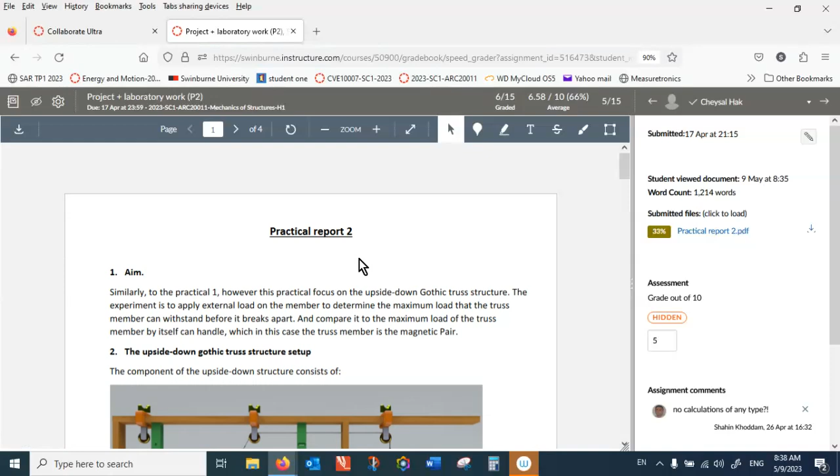You did submit them, but let's see if you have done the snapshot for the E-calculator, when it shows the deformed structure. Oh, you want me to include that? Yes, these are, I thought just go on the results. Can you scroll up a bit? I just wanted... I thought you just want this one. No, this is nothing, it doesn't show the deformation.

For every case you solve, you get a distribution of the internal forces. So you want to show, look, this is the maximum tensile load. How can I check this from this image? It doesn't have anything, this is just geometry, no load, no deformation, no forces, right?

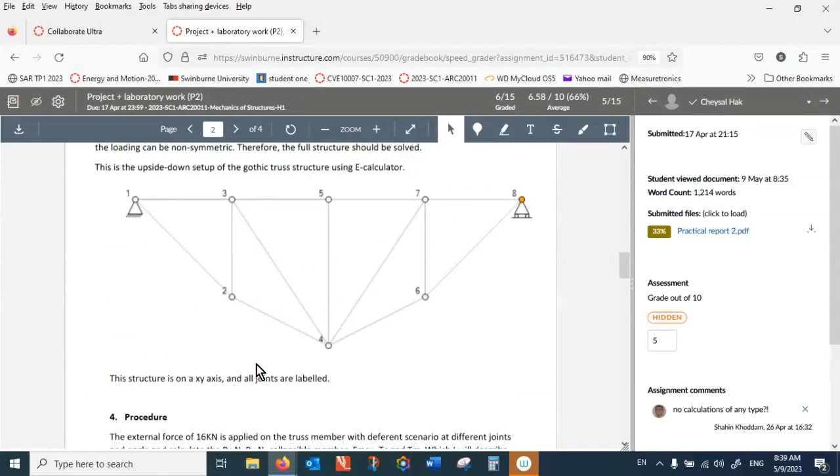My bad. All right, I should have, I did it but... yeah, yeah, that's okay.

That's okay, but I see that many people haven't done their submission, and that makes me worried. So if I go to the grades...

This is Prak. So Daniel, Abdullah, Ahmad, Nijil, Barnaby, Shah, yeah, they haven't done these reports, not to mention Serish. All right, let's wait for everyone to come. Thank you, all right.

All right, today we will be running a demonstration, and tomorrow is for the third lab.

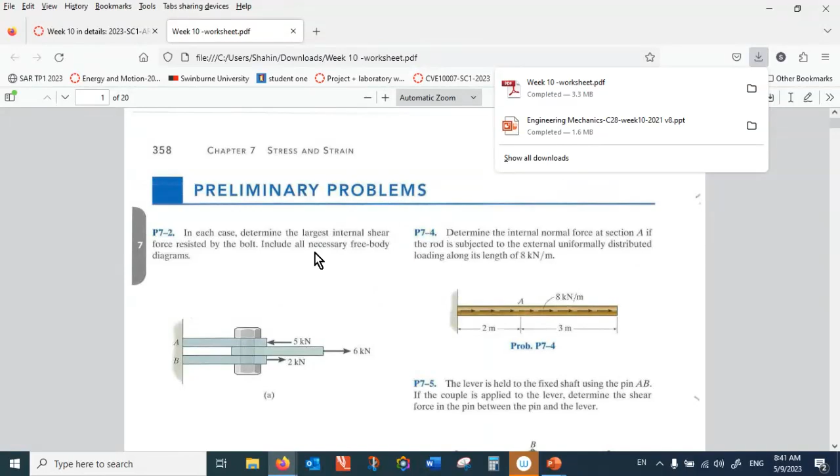Let's go to page 358. Okay, 358, and here we have some problems regarding average stresses, whether they are shear or normal. Let's take the...

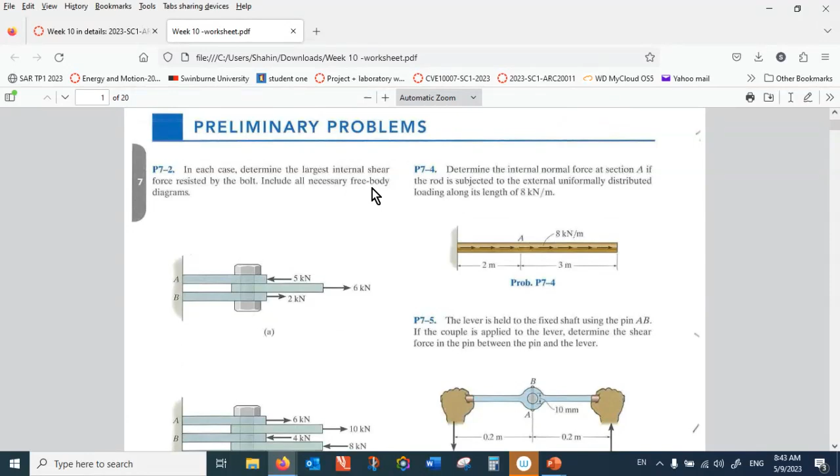Okay, we'll start with problem 7-3, that is on page 358. Can you see it from there? Is it visible?

Okay, so here you've got a bar, and in this bar there are a number of point loads, and as a result the normal stress is not constant through the bar. So if I choose to make my section between B and A, or between B and C, C and D, or D and F, for each the internal force would be different.

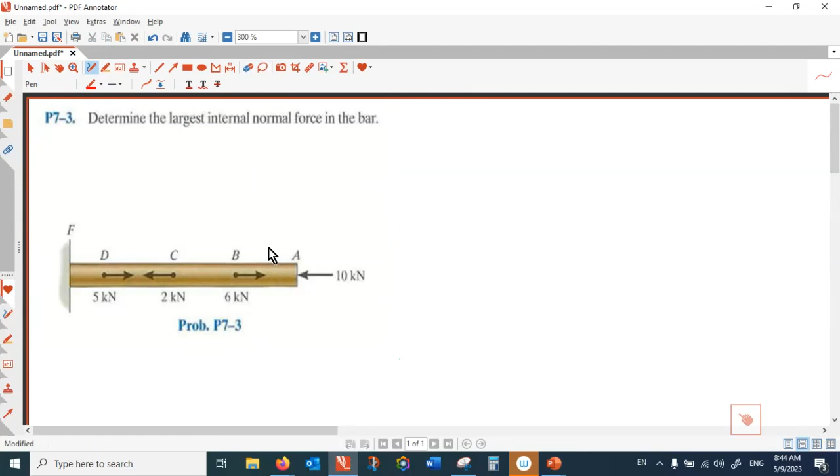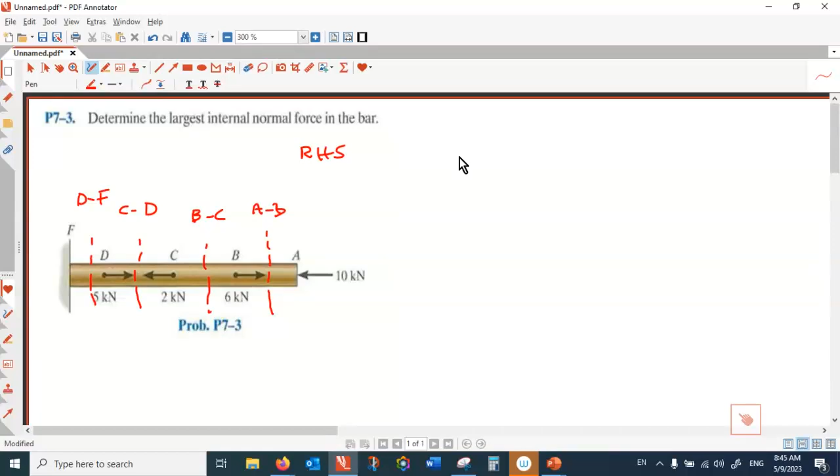All right, so let's find out. If I make that section AB, that is the free body diagram, and I'm looking into the right-hand side free body diagram. This is for BC, and that is for CD, and that is for DF. So when I make the section at AB, the free body diagram looks like this: this is A, and that is 10. So the right-hand side is going to be equal to that one, 10.

And so here, F-AB is equal to minus 10. That means the member is under compression.

So when we make the free body diagram for BC, then you will have a free body diagram with 10 here and 6 here, and then I need another 4 to make this at equilibrium, right? 4, 6, 10 cancels 10 from right to left. So here I get the internal force of BC is equal to minus 4. That is also in compression.

And if we make the free body diagram between C and D, so that is 10, 6, and then you have a 2 here. So I need another 6 here to make this balanced, right? So here, 2 and 10 is 12, so 6, another 6 makes this 12, 12. So this is F-CD.

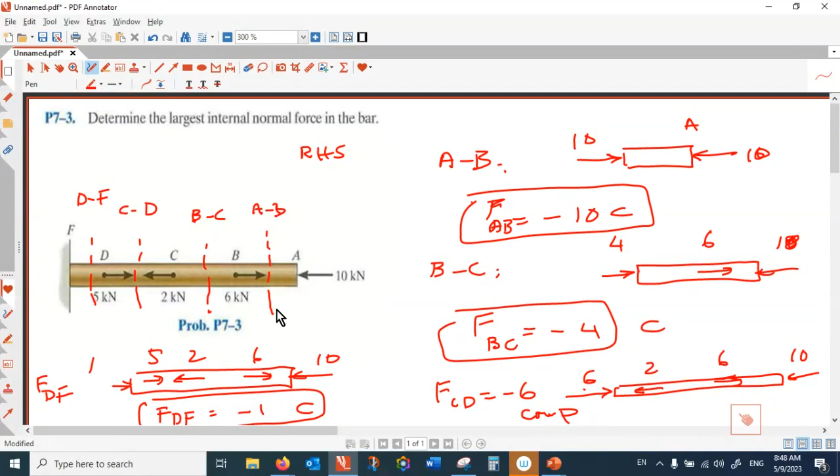All right, so the largest internal stress would happen where? The largest internal stress develops between A and B. So here we got the largest internal force, largest internal stress, because the cross section doesn't change -- the cross section is the same.

Question. You want this, or can I go to the next question? Clear? All clear?

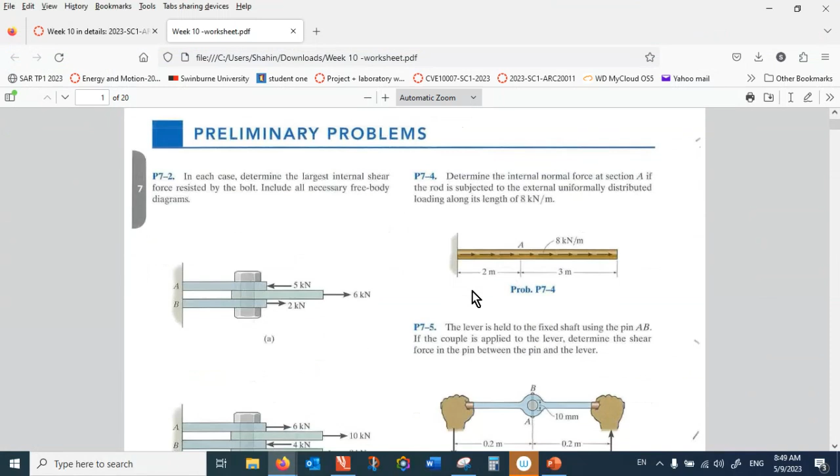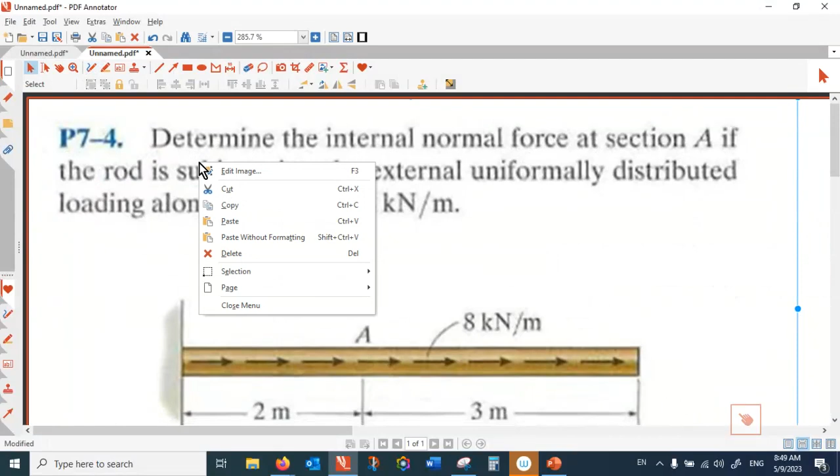Do you want to try this one yourself, or should I start discussing the problem? So here the axial force is distributed, that's a load intensity, but that is in the x direction. The unit is kilonewton per meter.

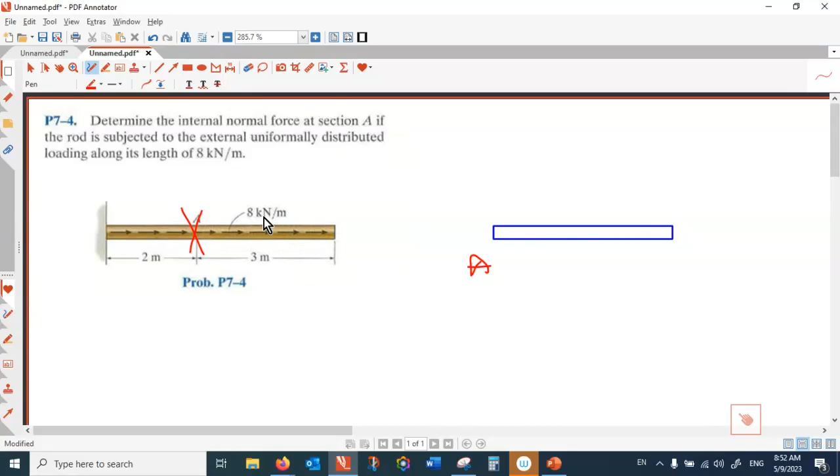I have only a portion of the distributed load for the length of 3 meters. So for that 3 meters, 8 kilonewton multiplied by 3 meters, that is 24 kilonewton. So where should I place that force? It doesn't matter, but basically if I want to concentrate that force, should I put it at the beginning, at the end, in the middle? Where? In the middle, right? We know that the resultant force can be lumped in the center of the shape.

So this 24 comes here, and then I have to add a reaction force at A. Generally speaking, we assume that it's in a positive direction, but because there's only one force, I know that the force has to be in this direction to cancel that one, right? So here Fa becomes 24 kilonewton.

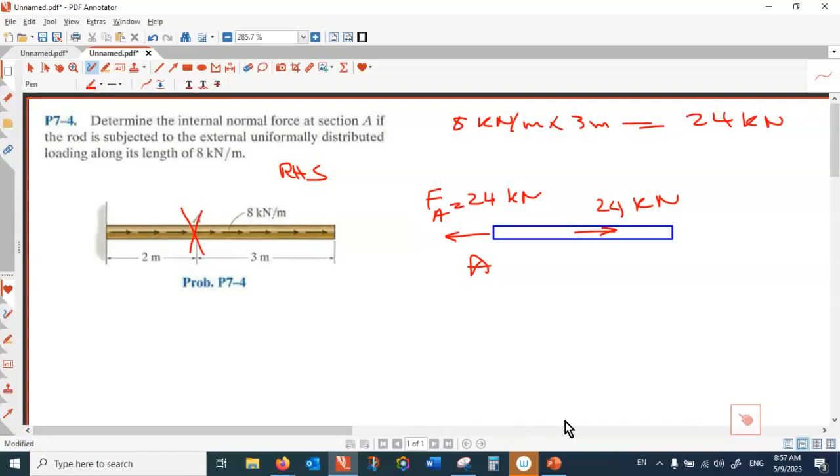All right, 359. I've got 7-7. So that's interesting. Maybe you could give this a go before we try that together.

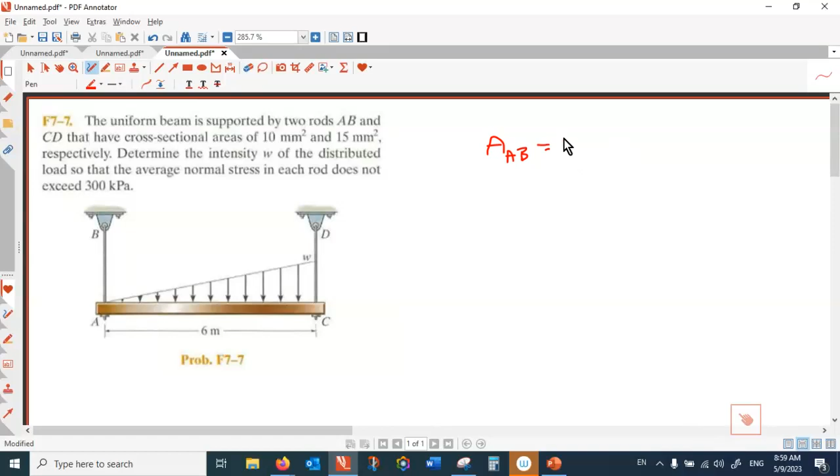Let me summarize the input for you. AB and CD have a cross-sectional area: the area of AB is 10 square millimeters, and the area of CD is 15 square millimeters.

We want to find the intensity such that the normal stress in AB equals the normal stress in CD. Having the normal stress equal doesn't mean the internal forces are equal, because they have different cross sections—one is thinner, one is thicker. So to make the normal stress equal, the internal forces should be unequal to compensate for the cross-section difference.

I would be happy if someone can tell me what steps should be taken. Nguyen, what should we proceed with? What is the first step? Shah, what is the first step? Speak up. You mean distributing the load to find... changing the distributed load to a point load, and then what? Chase, what is the first step?

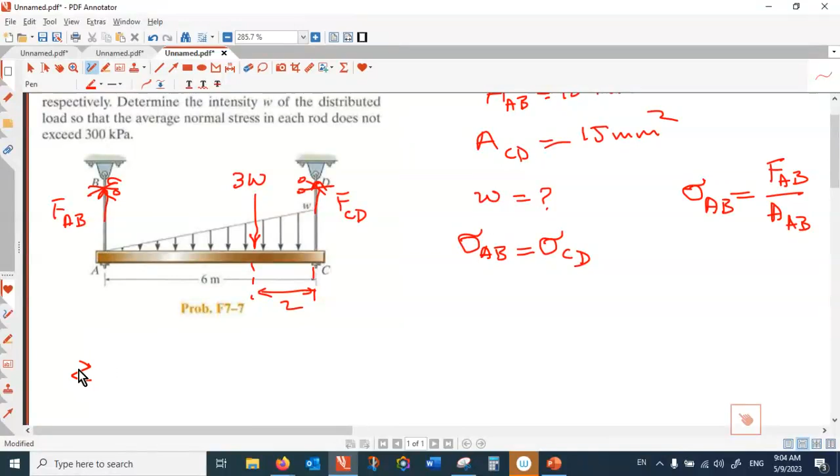What happens if I take rotation with respect to A? Net rotation with respect to A equal to 0, in the positive direction. That would vanish FAB, and then you have 3W times 4 in the negative direction, minus 3W multiplied by 4. This one, if tensile, would be positive, plus 6 FCD equal to 0. So therefore, FCD is equal to 2W.

Now that I have FCD, it's easy to find FAB because the net vertical forces are 0: 3 down, 2 up, so AB would be 1W—1W plus 2W is 3W, which cancels with the 3W here. That's one way of doing it. Or you could write net rotation with respect to point C equal to 0, which also gives the same answer. Either way, FAB is equal to W.

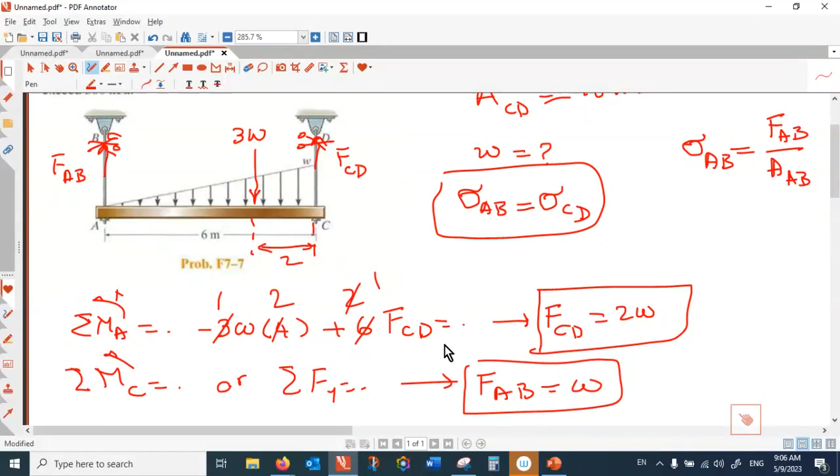What should I do next? Now that I have forces in terms of W, we want to make the stresses equal, so let me construct that equation: Sigma AB is FAB divided by area of AB, which should equal FCD divided by area of CD. That's the condition we were looking for—we wanted the stresses equal in both members. Plugging in the numbers: FAB is W divided by 10, that should equal FCD which is 2W, divided by the area for CD which is 15.

Is that what the question is asking? Because I read it as: they want you to find... they both just have to be less than 300, not necessarily equal. That's the way I read it, but I might have read it wrong. All right, let's see.

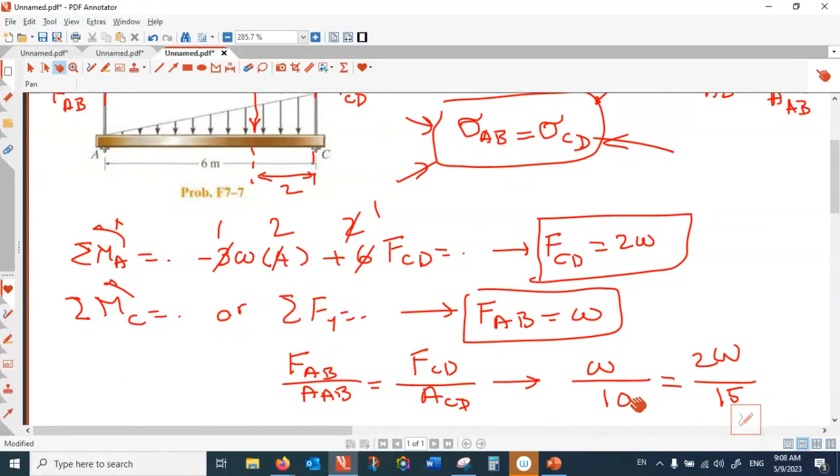You don't want that to exceed 300. I didn't read the last part. You're right, but they don't actually have to be equal, so they should not exceed 300. Because this equation, I don't think you can solve it - if you cancel W, then 1 over 10 is 2 over 15, that's nonsense. So thank you, Aiden, you're right, that condition is not right.

The condition is: the largest value of the stress should still be smaller than 300. So in other words, you want both sigma AB less than or equal to 300 kilopascal, and sigma CD also smaller than 300 kilopascal.

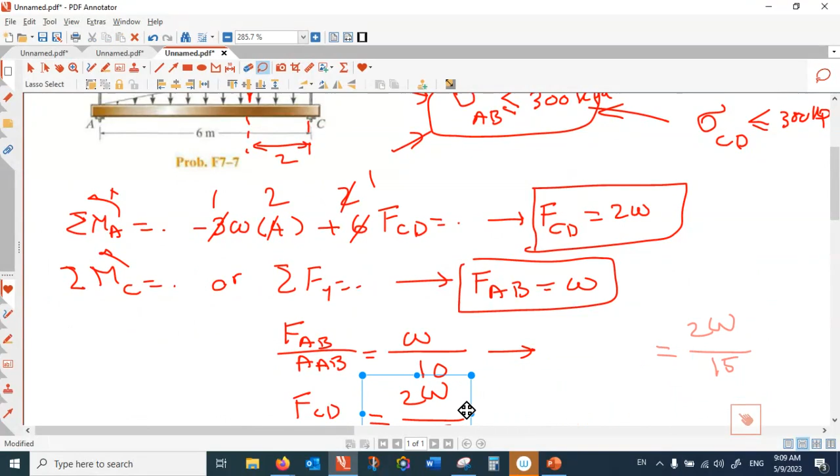So here, okay, now I'm applying the conditions. The first one is normal stress in AB, and this is normal stress in CD. For that to be smaller or equal to 300, when this is kilopascal, you have to choose the units carefully, because this is meters, so your force will be calculated in kilonewtons. So kilonewton divided by square meter, that's kilopascal, right?

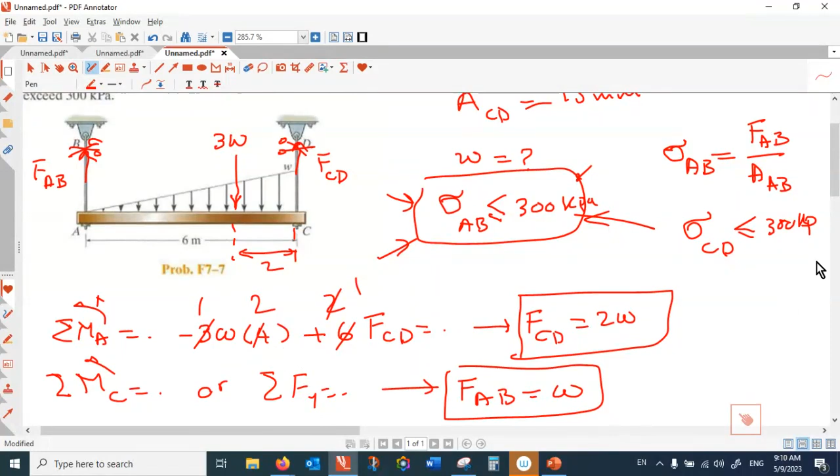So let's try this condition and see which one is more conservative. This is 300. If I solve the first one, W should be smaller or equal to 3000 kilonewton per meter. If I solve this one... 150 times 15, that is 2250.

So which one of these conditions is more conservative? The bottom one, yes. So if you go with the bottom one, both members remain under that stress. But if you go with the first one, AB would be okay, but CD would exceed that stress. So this is the right answer.

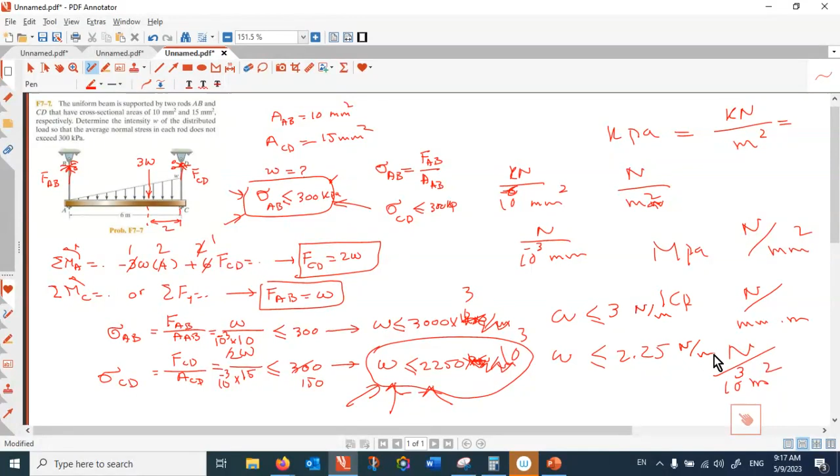All right, the next question we have is 7-8.

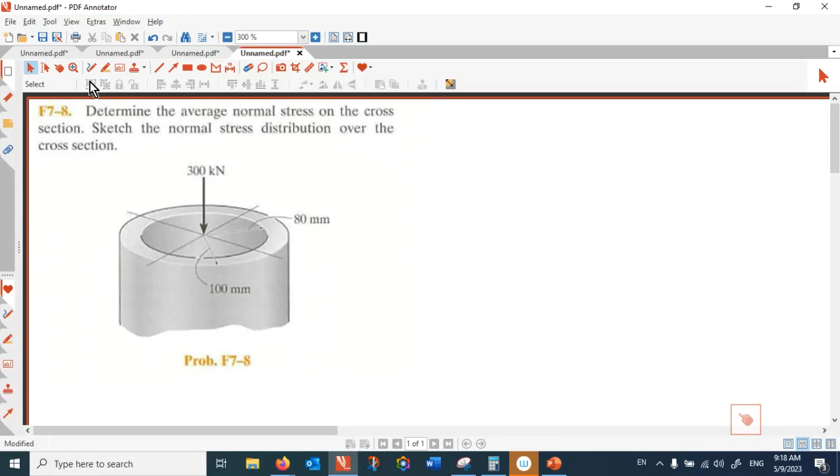So here the force is 300 kilonewton. And what about the area? The area is pi by 4, and I'm calculating this in square millimeters.

So these are the radius, not the diameter. That's pi times, that's 100 squared minus 80 squared. That's the area.

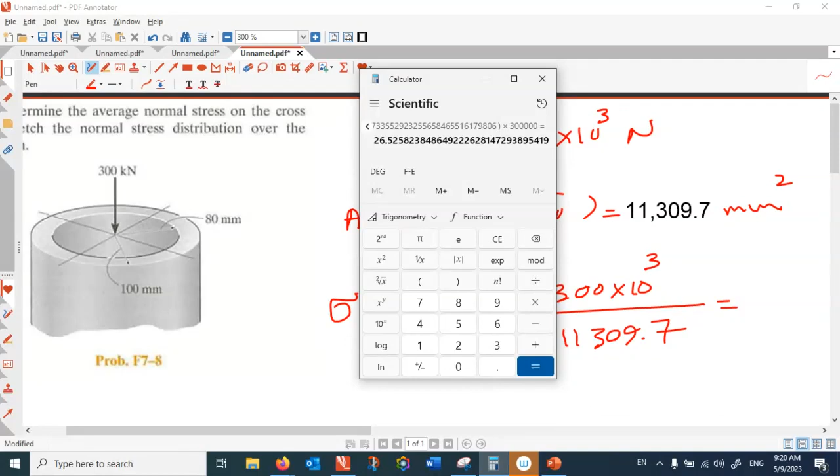Now the stress in megapascal, that is F in Newton divided by area in square millimeter. That is 26.53, and the unit is megapascal. When you keep the force in Newton and the area in square millimeter, the outcome is megapascal.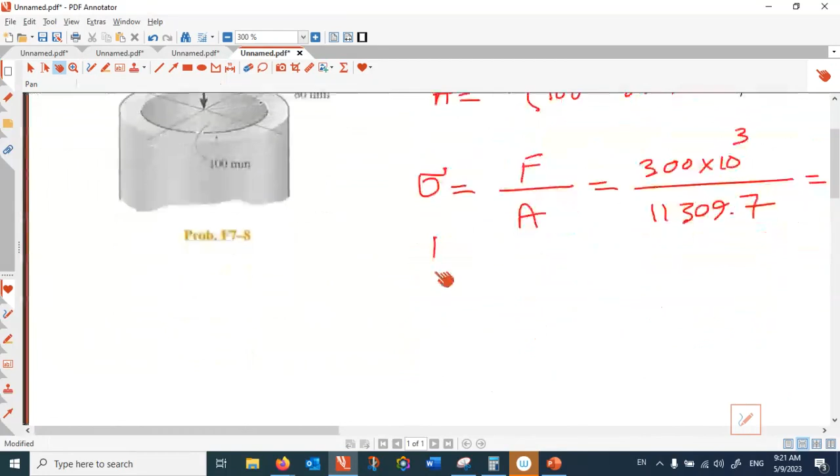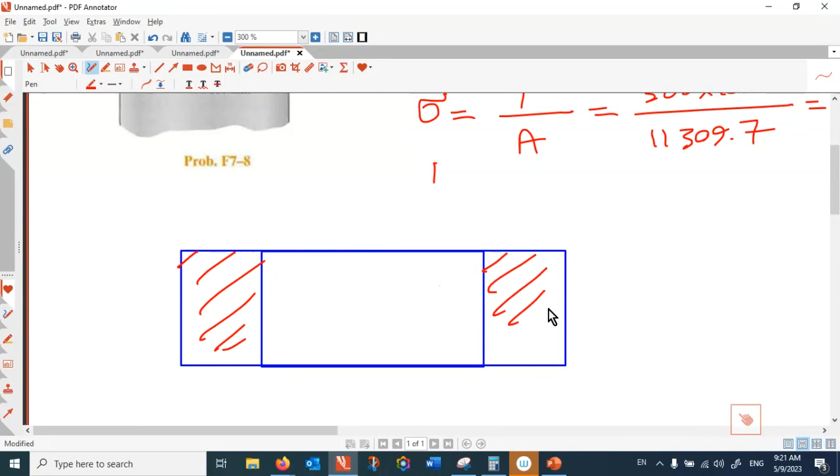Agree? The next thing is you want to show the distribution of the stress over the cross section. Let me show this as a cross section. So this is my pipe. If I make a section, then the stress distribution, I mean the average stress distribution, is like so.

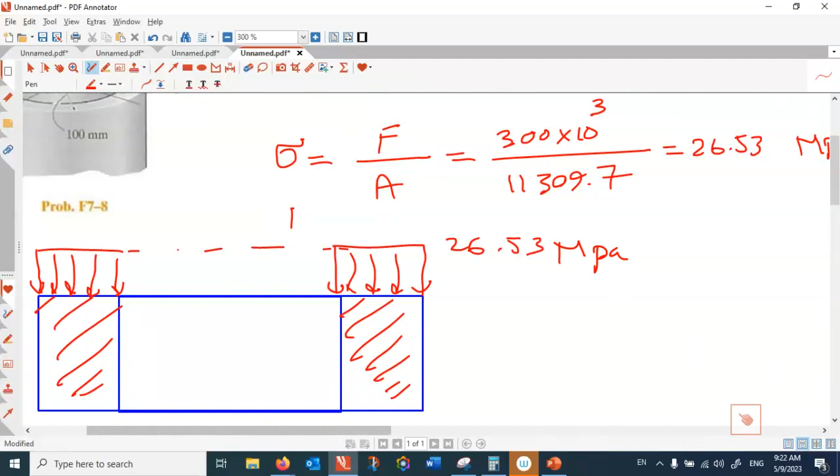26. Anyone needs clarification, or is that clear? You're not sure? Does it just say it's 26.5 for the whole? That is the distribution, that's a load intensity. And then these kinds of calculations are for the average stress. In practice, you might have a stress concentration at the sharp edges, but here we are taking an average one.

So the next one is 7-11. Let me know when you finish with this. Number 11.

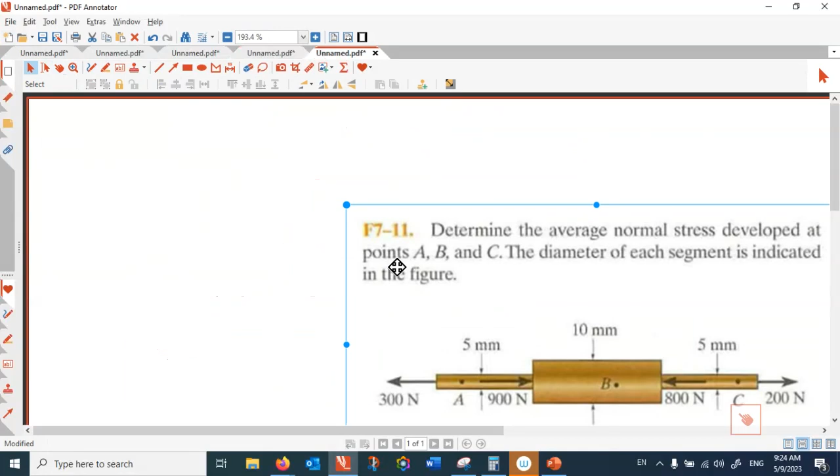Can you see it from the back, or do you want it larger? Here you want to find the average normal stress at points A, B, C. And the diameter is not uniform. So the first step is you have to make a number of free body diagrams to find the internal forces. Once you have the internal force, depending on what the cross-sectional area is at that point, you calculate the average normal stress.

First thing first, I mean that is not needed, but if I ask you to check whether this member is at equilibrium, how would you check? The sum of the forces horizontally should be 0, and that is true.

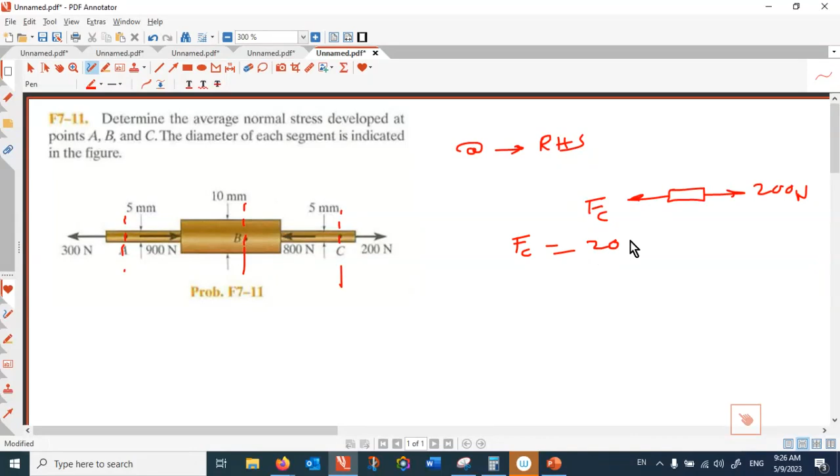Now, it doesn't matter which side, I need one free body diagram at point C, one at B, and one at A. If you are smart, for point C I take the right-hand side free body diagram. That's the easiest free body diagram, and it has 200 Newton, and here I have FC. So FC is equal to 200 Newton.

For B, it doesn't matter which free body diagram I take, right-hand side or left-hand side. So at B, I go with the right-hand side free body diagram again. So the free body diagram would look like this: 200 Newton and 800 here. FB, so FB is 600 Newton in compression.

And 200, is this compression or tension? That is tension, right? And what about the last point, point A? At point A it would be smart if you take the left-hand side free body diagram. I mean both of them give you the same answer, but left-hand side is easier to solve. So that free body diagram would be 300 here and FA over here. Therefore, FA is 300 Newton, and that is under tension.

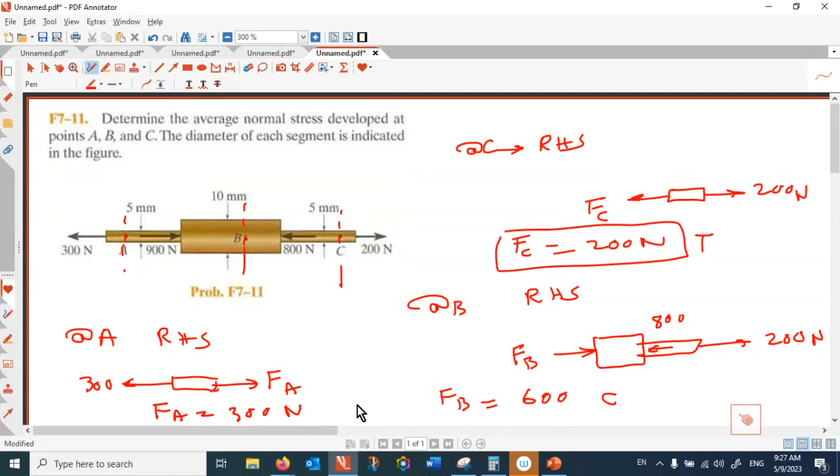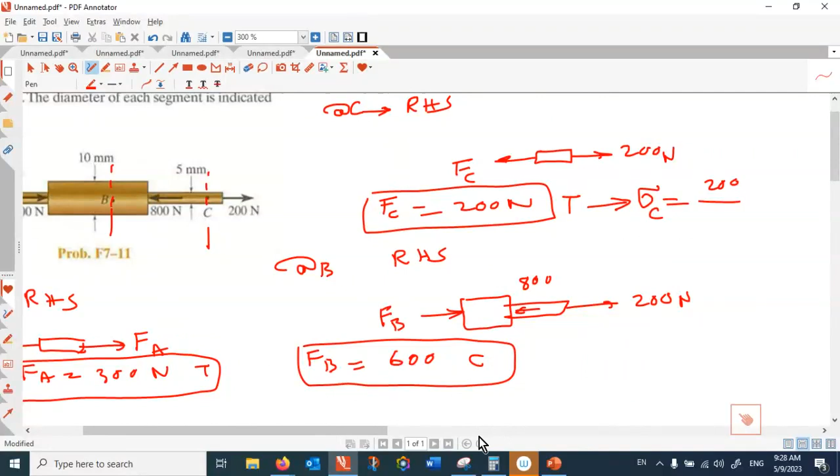And then how do I find the area? The area, when the diameter is provided in millimeters, that is pi by 4 and diameter squared, which is 25. And then what you get here, that is in megapascal, right? How do I know that's megapascal? Because the force is in Newton and the area is in square millimeters. That would be megapascal. And then the outcome, that is in tensile stress. Tensile stress.

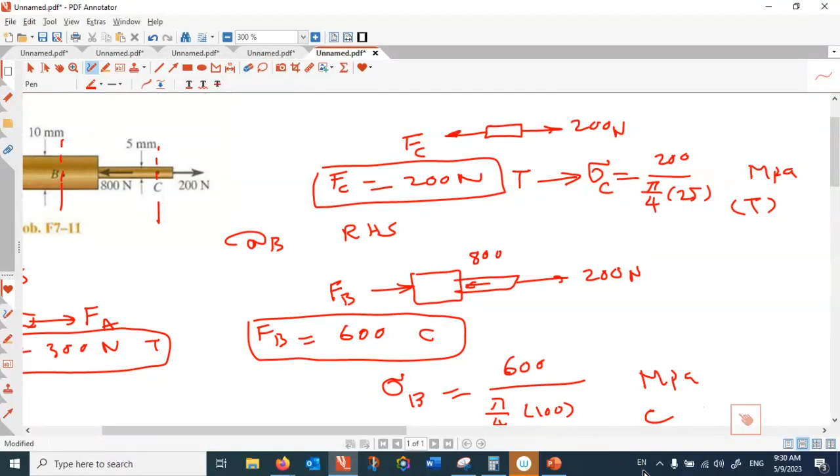So how should I go with B? The average sigma at B, that is 600 over pi by 4 times 10 squared, which is 100. And that is also in megapascal, but this one is compressive. And finally at A, my normal stress is 300 divided by the cross section over there, which is 5 again, pi by 4, 25, and here you get megapascal, and that is tensile.

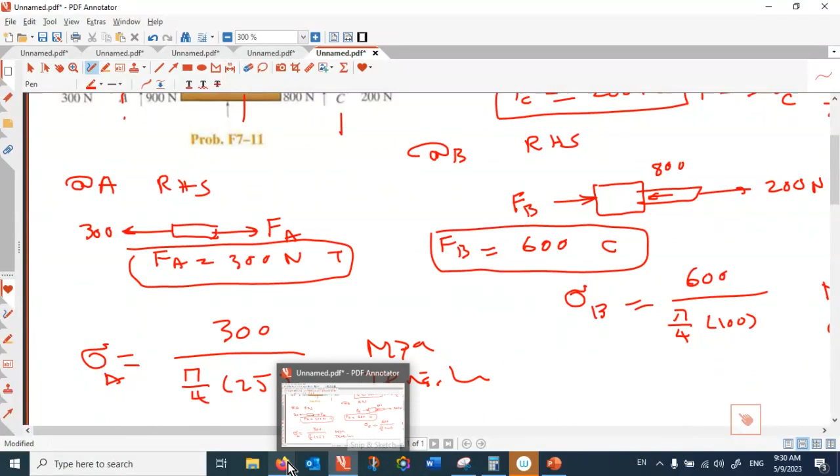So that was the point. This was question 11. Next one is 12.

People ask me whether they need to know material from before the midterm for the final exam. Well, I wish I could eliminate that, but free body diagrams are something you need to know. Without a free body diagram, we cannot find the forces and stresses. You still need to know this is a pin joint structure, and which parts are two-force members. If I want to solve that problem, what is the first step?

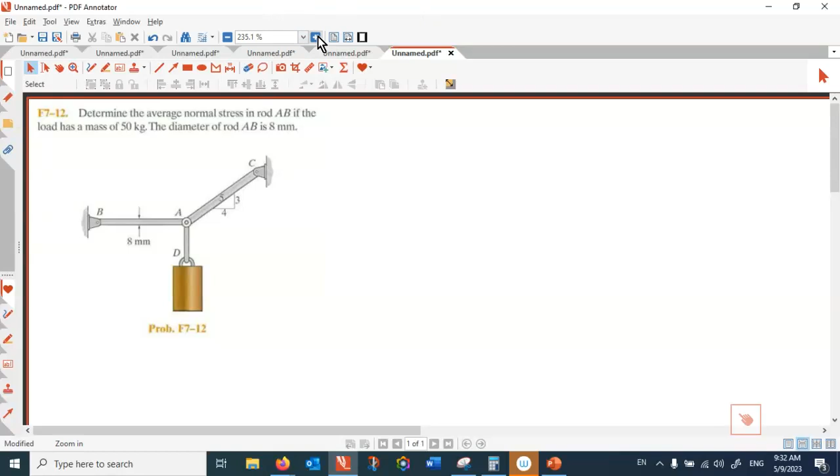Just give us a hint, how should we start with this one? Figure out the stresses. Before stresses, what do we need? Draw a free body diagram. Free body diagram to get what? Internal forces, yes.

The best approach would be to take a free body diagram around A. So I'm going to have one force at that angle, another force like that, and the only known force is 50 kilograms, which is almost 500 Newtons. How do I solve this free body diagram? That is FAB, and this is FAC. One way of solving that is I can simply resolve the force into two components.

That's the easiest way to do it. I could construct a triangle, but then you'd have to use the sine law or cosine law to solve it. This is easier, because if I resolve FAC into the y component, that is FAC times sine theta. Sine theta is 3 over 5, which is 0.6. And if I resolve it horizontally, that is FAC times cosine theta. Cosine theta is 4 over 5, which is 0.8.

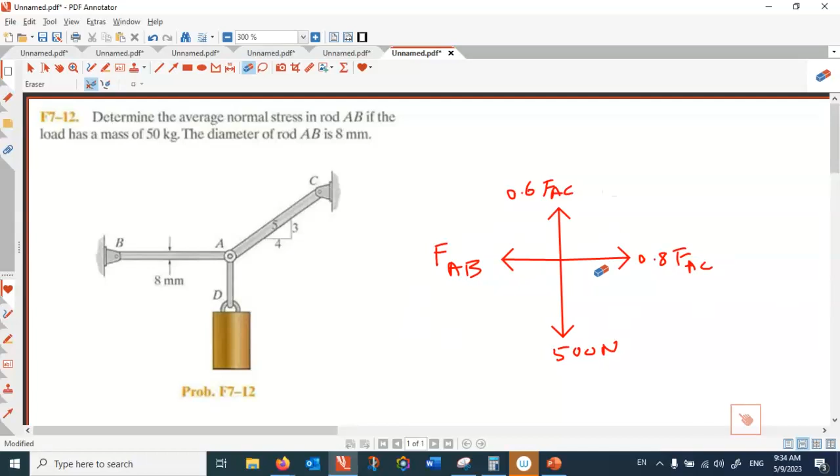Now that I've resolved it, I don't need that force anymore, I can get rid of it. Is that clear? From here, the steps are straightforward because 0.6 FAC is equal to 500. So net forces vertically equal zero, that is 6 over 10 FAC equals 500, and FAC is 5000 divided by 6.

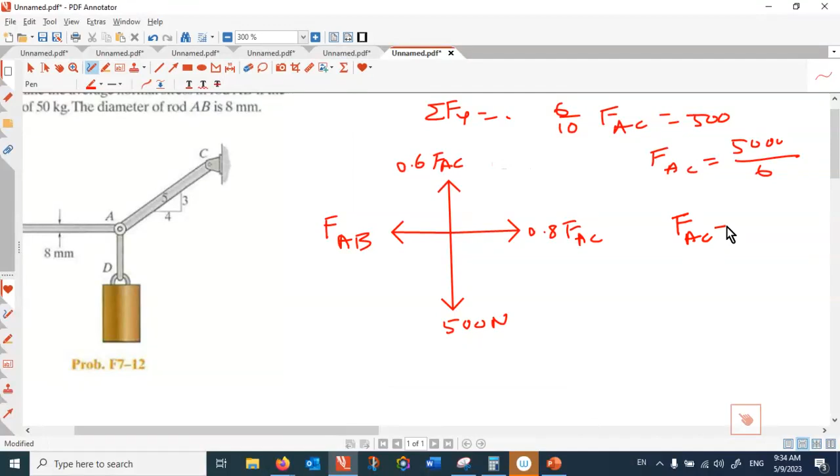That gives 833 Newtons. So now FAB is equal to 0.8 FAC, which is 666.7 Newton.

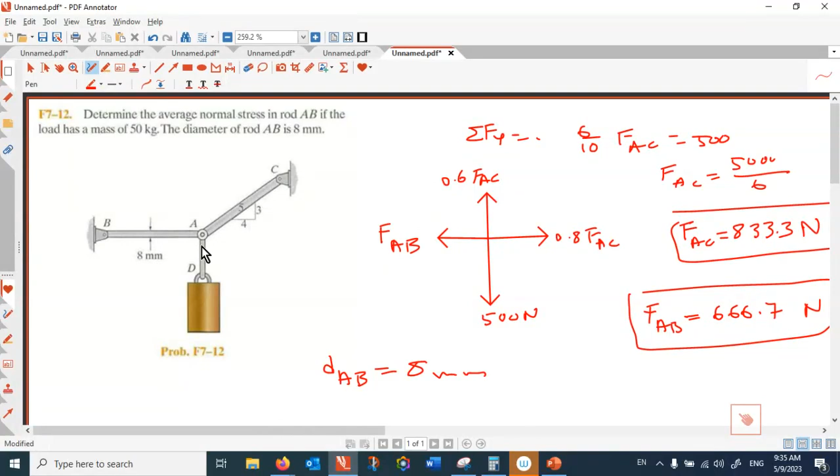Now we've managed to find the internal forces. What should I do next? The diameter of AB is equal to 8 millimeters. We are not concerned about the stress in AC, we only want the stress in AB, so that's all I need.

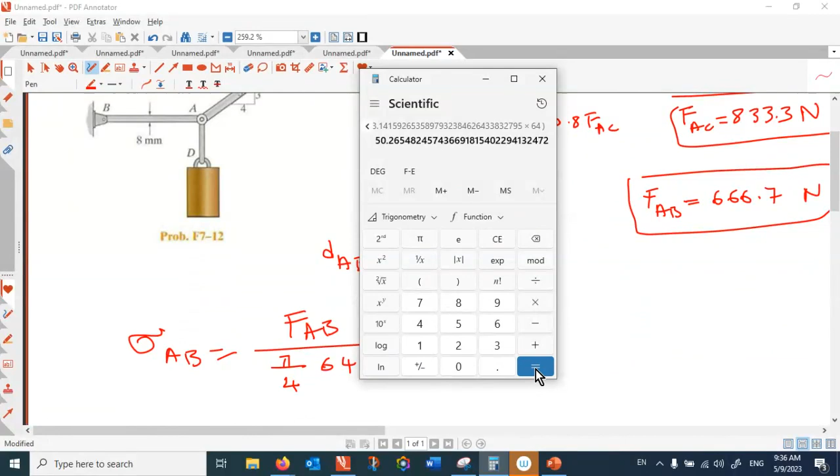So let's find the stress in AB. That is FAB divided by pi over 4 times 8 squared, which is 64. That gives 13.26, and the unit is megapascal.

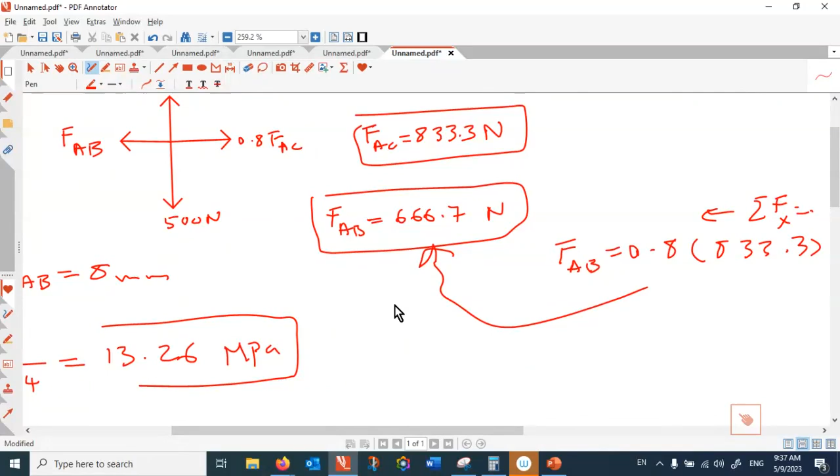Yep, that is net forces horizontally equal to zero, that is FAB is equal to 0.8 FAC, which is 833.3. If you multiply that, it gives you this number.

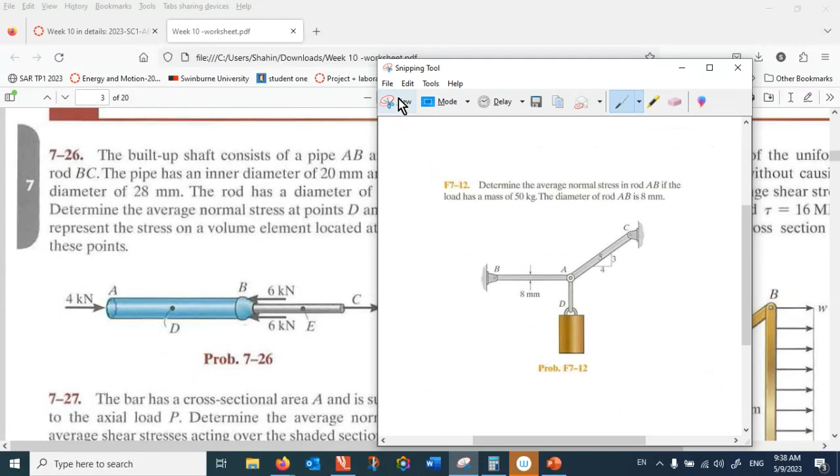By volume element, when it says volume element, it's located... let me see. You are ahead of me, I'm still not there. Okay, so that is one way of saying it, per volume, like the stress state. Determine the average normal stress at the point and represent the stress on a volume element.

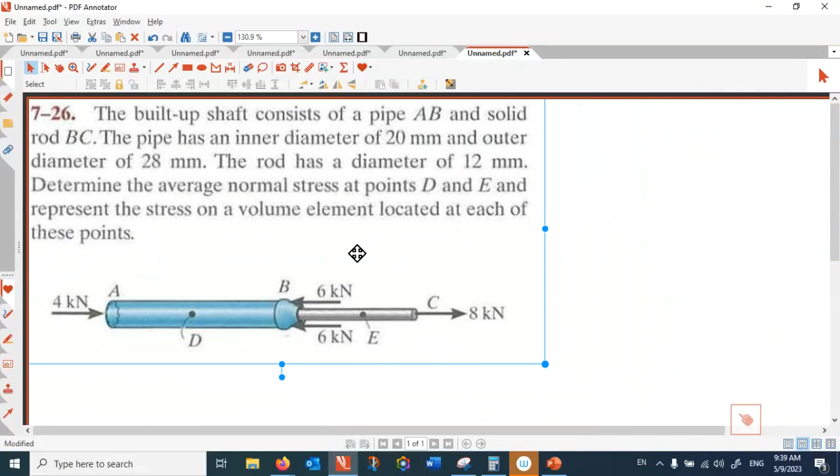What it says is carve an element from inside at D and show how this stress is oriented. Is it oriented on the side faces, the top faces, or the front faces? Once you do an element, in general you could have forces on any of these faces. So this is X, Y, Z, and here all of these are normal stresses because the forces are perpendicular to the area. You could also have forces acting on these planes, which create shear stresses. In this case, we are talking about normal stresses.

And it wants you to show where sigma D would be, on these two faces. So all I want to know is which face. That's what it means, just represent your results to show that you know what you're talking about.

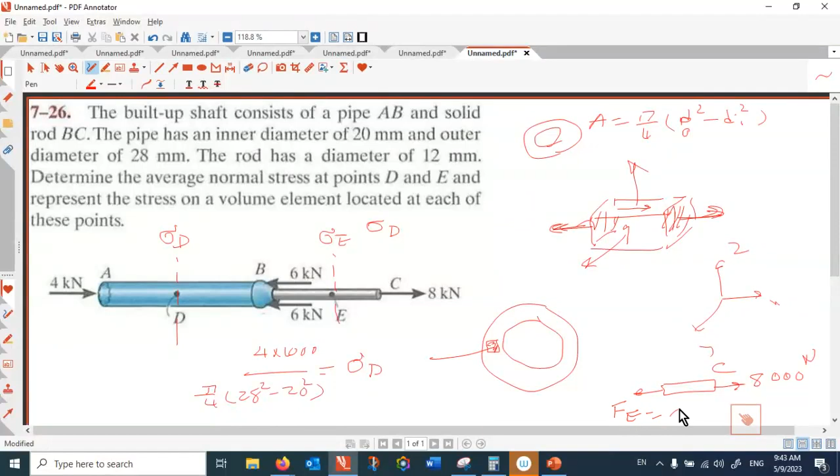But at point E, that is a solid bar with a diameter of 12. So when I make the free body diagram at E, it would be smarter to take the free body diagram from the right. So here, my free body diagram would be 8,000 Newton at C, and then you get FE equal to 8,000 Newton. That is under tension. And therefore, the stress at E will be 8,000 divided by pi by 4 and 12 squared.

So this is point E here. I can show this is element inside that rod. And then my stress is acting on this plane and this plane here. That is sigma E average, axial stress, axial normal stress.

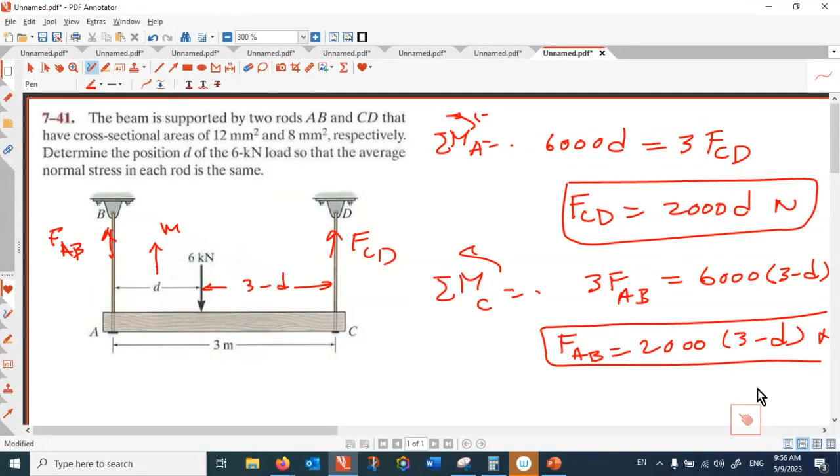All right. And also I know that we want to make the stresses on both rods equal. So that is stress in AB, I want to set that equal to stress in CD. So that is FCD divided by pi by 4, well, that is not needed because I've been given the areas.

Area of CD, that is 8 square millimeter, is equal to FAB divided by 12 square millimeter.

All right. Now, all you have to do is just plug the number: FCD, that is 2000 D divided by 8, is equal to 2000 times 3 minus D divided by 12. So now I cancel 2000 from both sides.

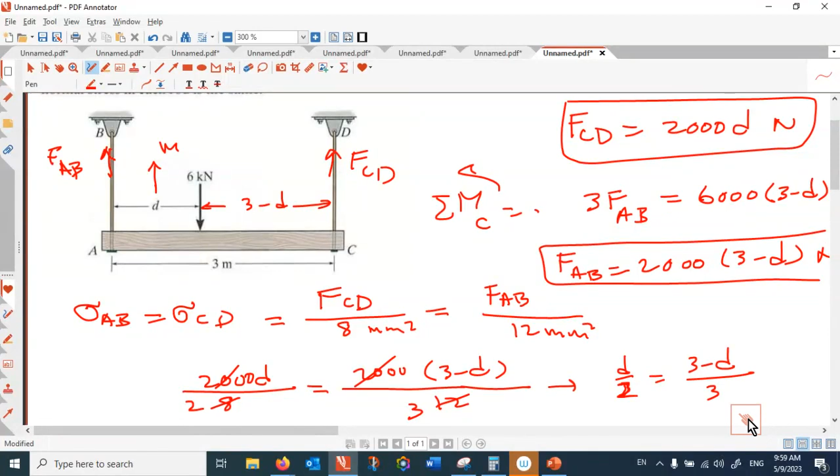So that is D over 2, that is 3 minus D over 3, right? So that is 3D is equal to 6 minus 2D. Therefore, 5D is equal to 6, and D is equal to 6 over 5, which is 1.2 meter.

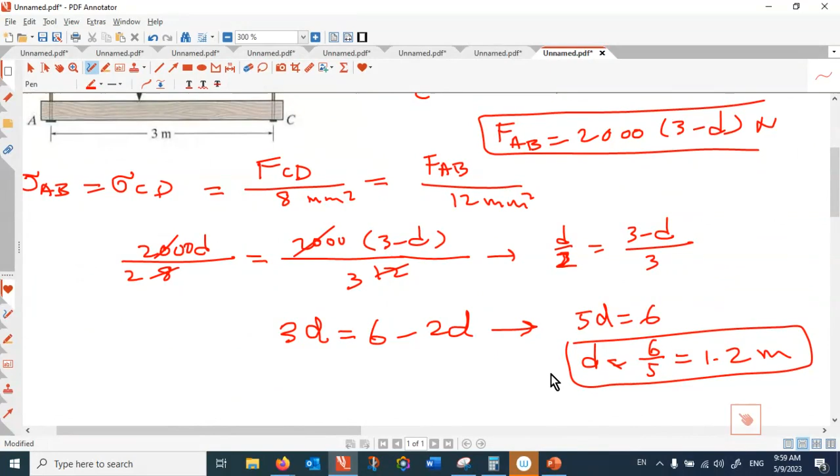Makes sense? And then this is just a rule of which area is smaller. The smaller area is CD. So to make the stresses equal, the force should be closer to AB, not to CD. If that's closer to CD, the force CD becomes larger.

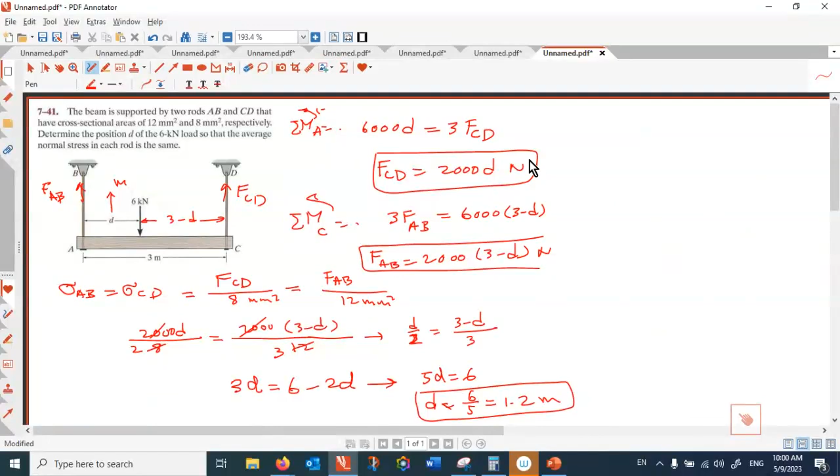Nguyen, how many hours did you sleep last night? Roughly 7. Marginal, 8 would be fine, but at your age, maybe 4. 4 is luxury. Yeah, I know it is very hard, but hopefully soon you'll be happy.

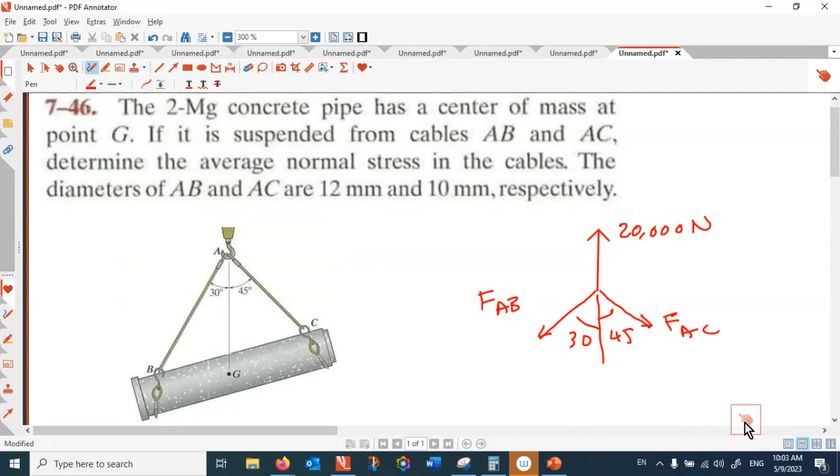Okay, so the best way of finding the forces is, I think, if we can construct a triangle, that would do the job, right? Otherwise, I have to resolve the forces into two equations, two unknowns to be solved. Maybe constructing the triangle is the tricky part.

Let me go 20,000 vertical, and then from the top I draw a line parallel to AB. If that is parallel to AB, that angle is 30.

And from the beginning of that one, I should draw a line parallel to FAC. So if that's parallel to FAC, that is 45. And then the third angle is 180 take away 75, that is 105. So this angle is 105 degrees.

All right, now that is 20,000, and that is FAC.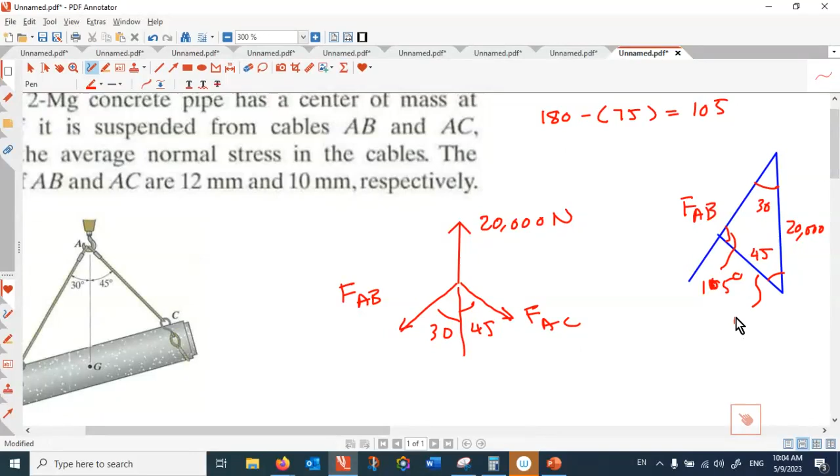So to solve this triangle, I use the sine law. That is 20,000 divided by sine 105 is equal to FAC divided by sine 30, is equal to FAB divided by sine 45. Correct?

All right, so that gives me two solutions. FAC is equal to 20,000 times sine 30 divided by sine 105, and FAB, that is 20,000 times sine 45 divided by sine 105.

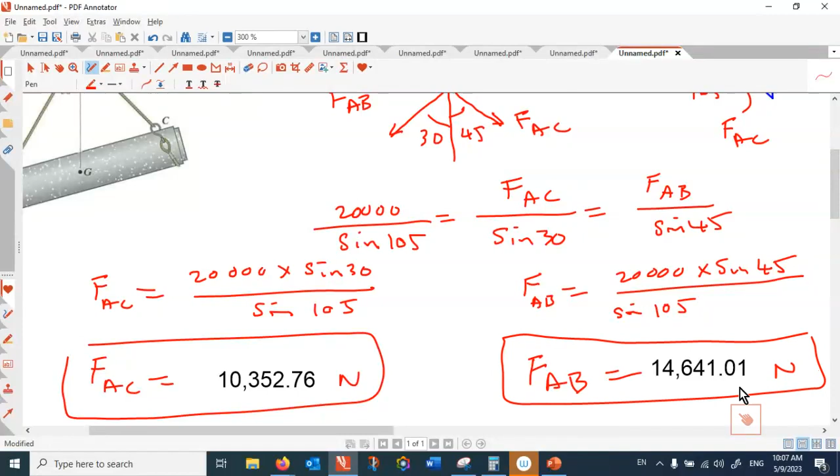So FAC, that is... all right, so now we managed to calculate the internal forces, and then the next step is converting internal forces into internal stresses, the normal stress.

So you have the cross-sectional area of each, in millimeters. Diameter of AB, that is 12 millimeter. Diameter of AC, that is 10 millimeter.